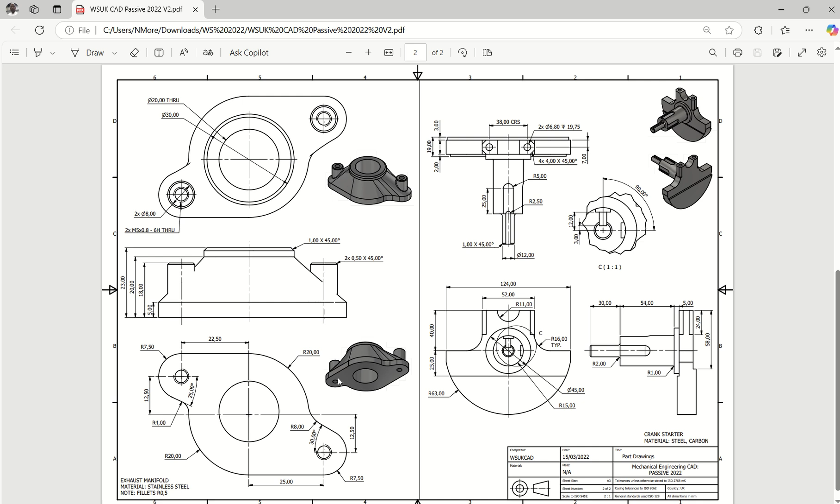Hello, this is another drawing from the 2022 entry pressure test for WorldSkills. I'll leave this up for a few minutes so you can capture the dimensions, because as we said, the other screen is smaller.

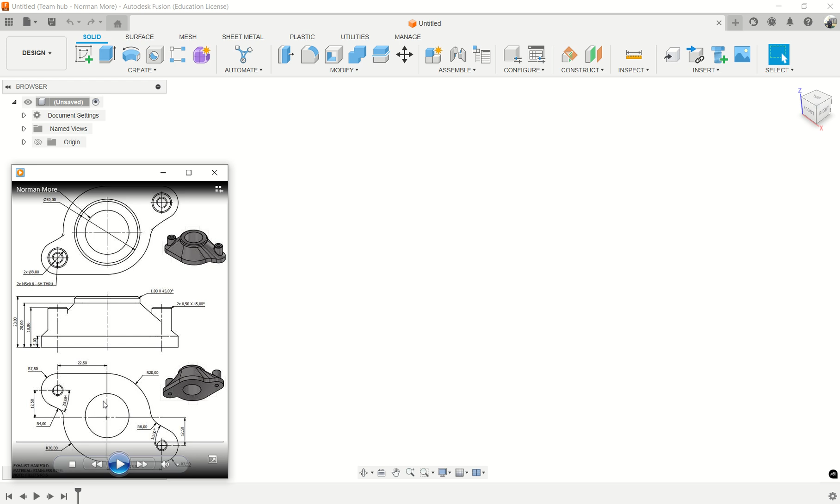Okay, so now I'll bring up our smaller screen and then we start drawing. We start with this bottom part. So I do a sketch on the top plane.

The big circle here is 20 radius, so I'm going to draw the big curve. I'm going to draw a circle of 40, which gives us a radius of 20. Then at the top here, I'm going to draw another circle, 15 mils, and at the bottom as well, another circle, 15 mils.

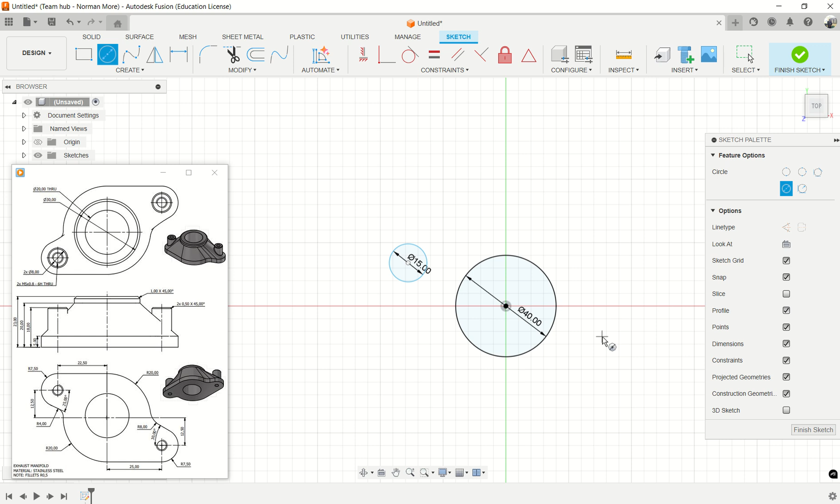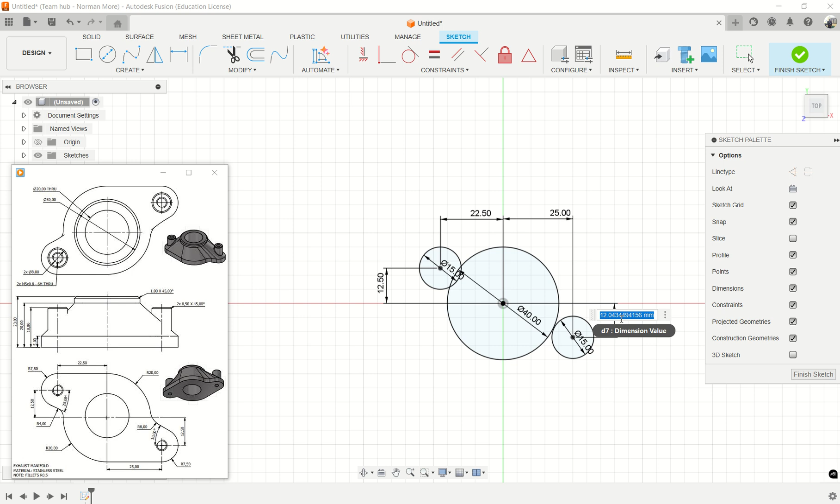Then we try and join these. So you put a dimension from here to there - those centers are separated by 22.5. Then the height from here to there is separated by 12.5. For this one, the horizontal distance is 25, and the vertical distance is the same as the other side, which is 12.5.

Okay, so I'm going to add radiuses on those two sides. I'll use a circle and constrain it. On this side, I'll use a circle of 8 millimeters, and then I will use this tangent constraint to there and to there.

And then for the other side, I'll also use a circle, that's 8, so that is 16 millimeters. Then I'll constrain this one to that one with a tangent constraint and also this side. That makes a neat curve there.

Then L for line, I draw a line from the top of that to the top of this one. L for line again, a line from there to the bottom here. Okay, so that seems okay now. We do the trimming.

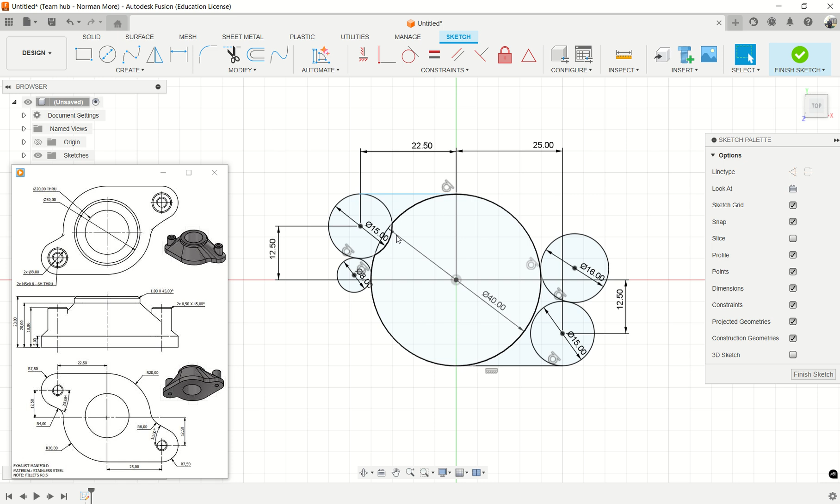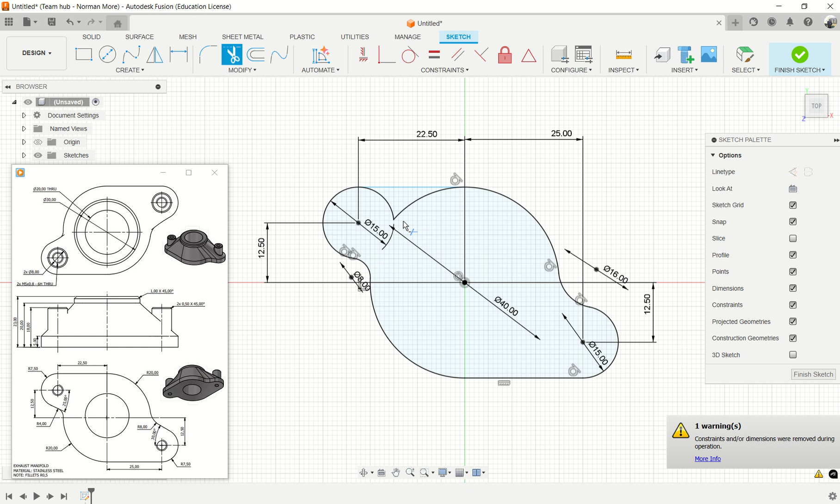Letter T. If I remove those, you can see the shape is starting to come. Remove those. Remove those, and that one. And this and that. So that's the shape we desire.

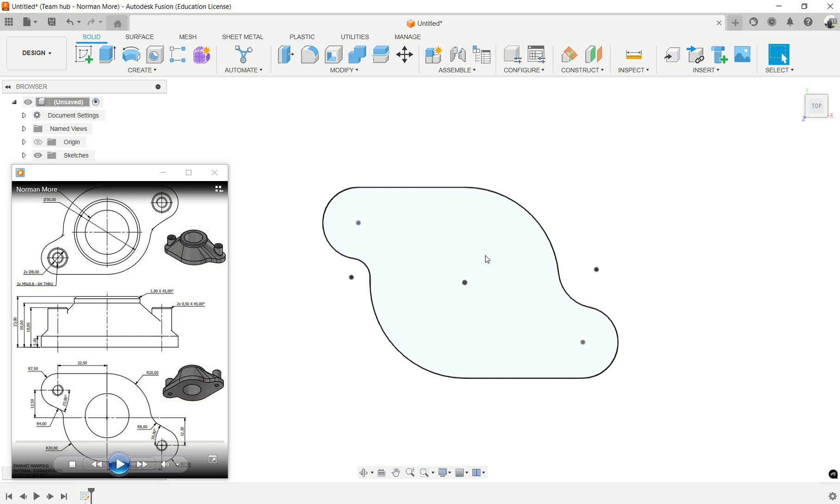There's a hole in the middle. We'll come to that later. So this will be our first sketch. In order to move from there to there, we have that small step, which is 5 mils. I will extrude this one by 5 mils.

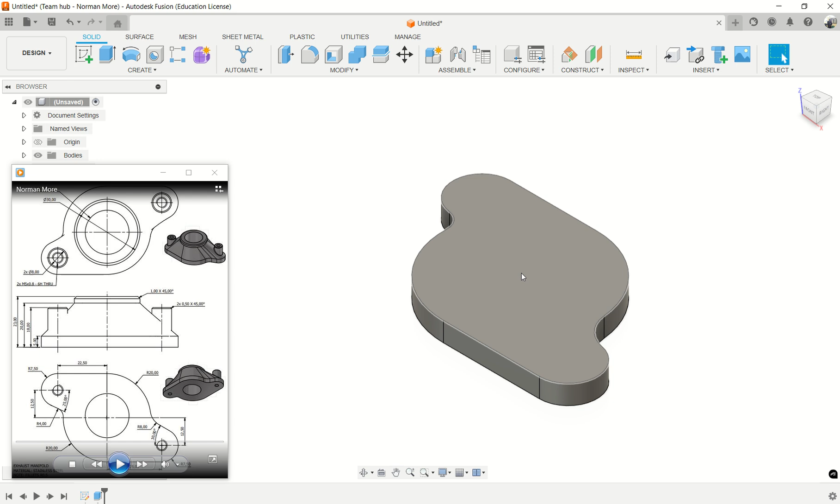If you go in 3D, that's what you've got now. So we need to make 20 mils. We're going to make a circle up there. From this surface, we offset a plane.

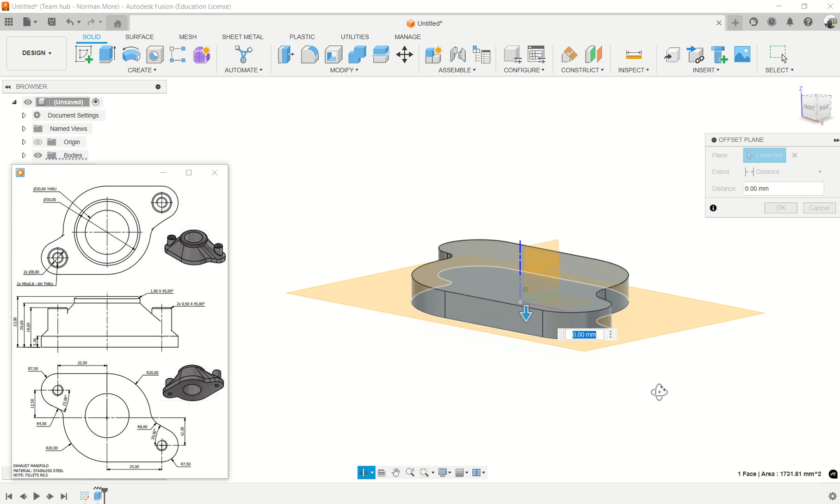Okay, which will be 15 from here, but let's use the actual dimension. So do an offset plane from the bottom, gap like that, which will be -20.

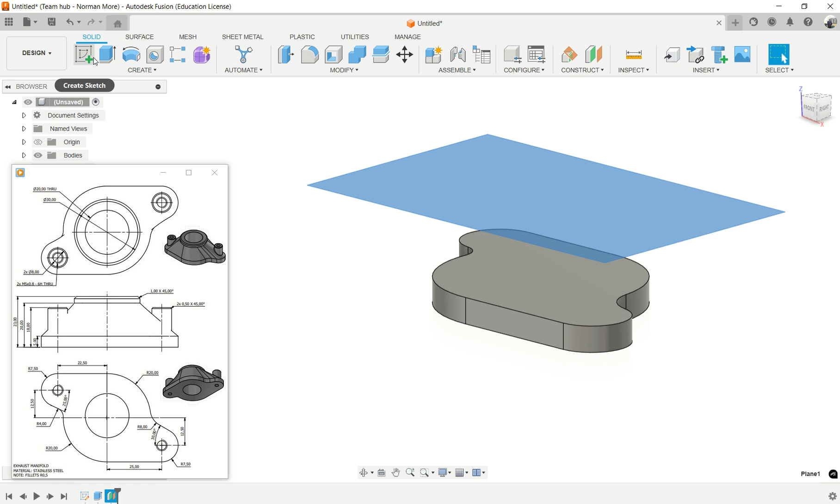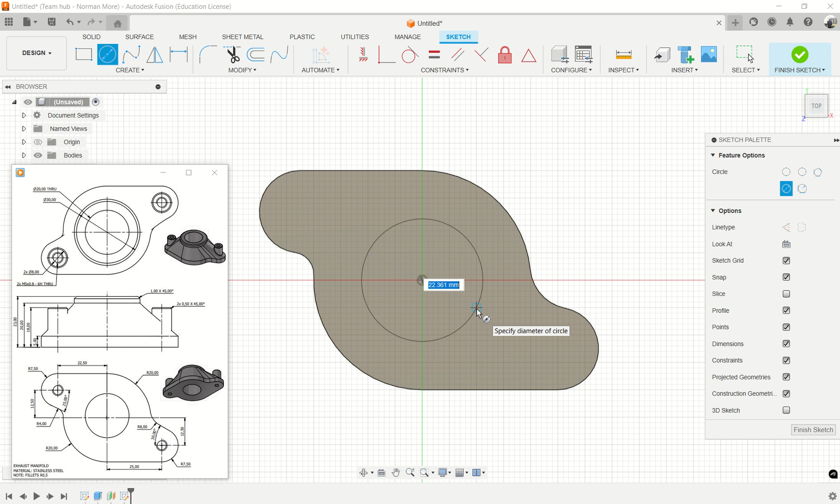So we have a plane there. So on that plane, we're going to draw that diameter there, which is 30, around there, up to 20. So we draw 30, do a circle, then we go to 3D. That's what we have.

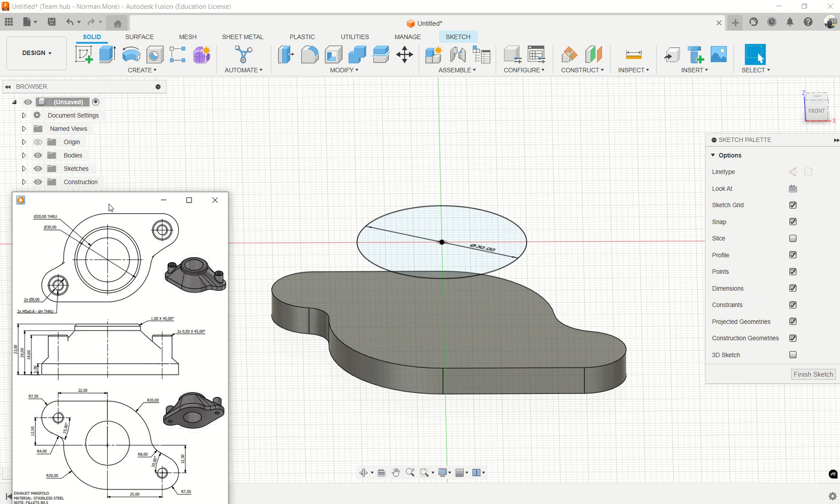So we need to loft this one. So go to solid model, pick loft. If it's not, let me push this one down. So I pick loft, and I'll pick that surface, that sketch, and I also pick this one, and that completes the loft.

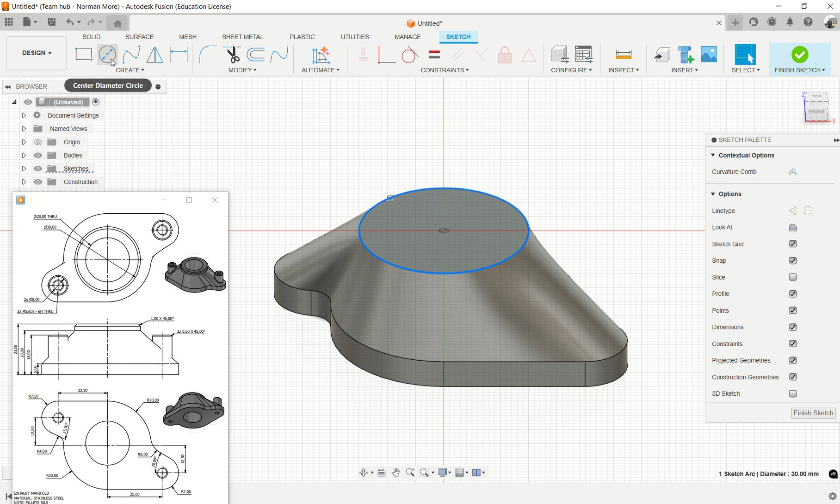On top of this one, we are going to have an extrusion. Let's just put a sketch there, but we shall use projected geometry. Then we push this one up by 3 millimeters according to the drawing. So if we extrude this surface by 3 mils, that pushes us up to the top.

We also have a chamfer of 1 mil. We put 1 mil on that as our chamfer. So that virtually finishes this.

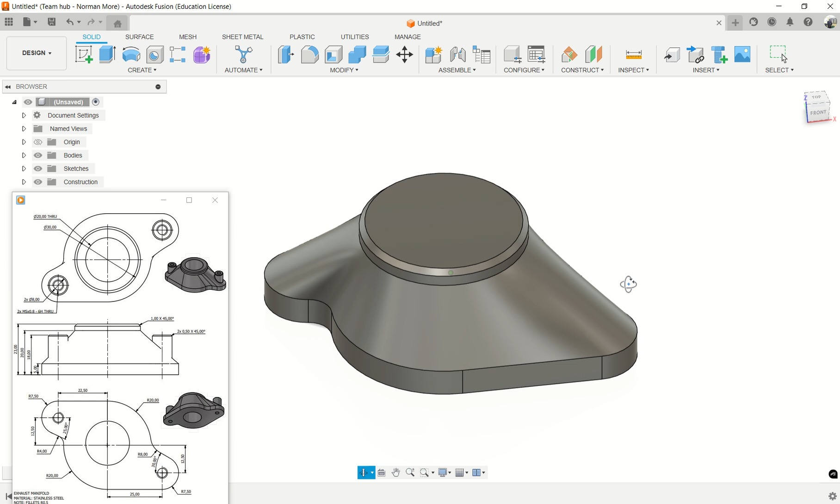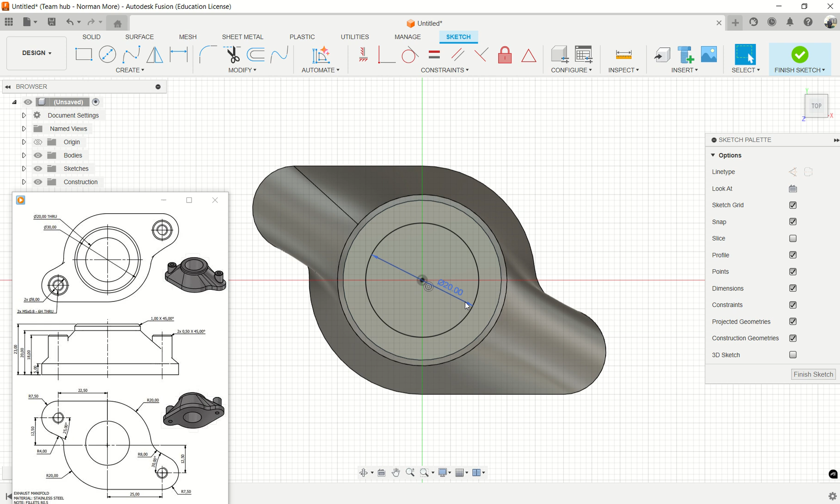So we need a hole here, which is a through hole. According to here, 20 through hole. So I do 20, and then I do extrude, click there, I do a cut distance, or click OK. So that one is there.

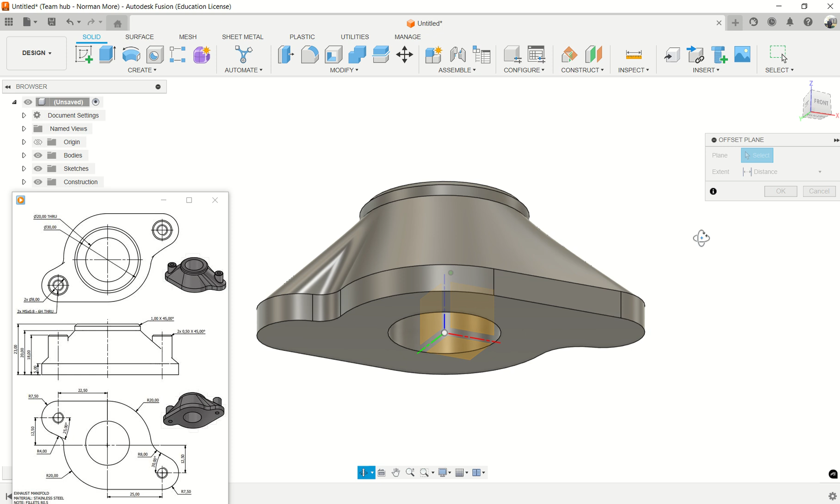So now those two ends, we are going to put again, they are 18 from the bottom. So I'm going to put an offset plane again, reference to the bottom here, and then put -18. Then we have that plane is where we're going to draw our sketches.

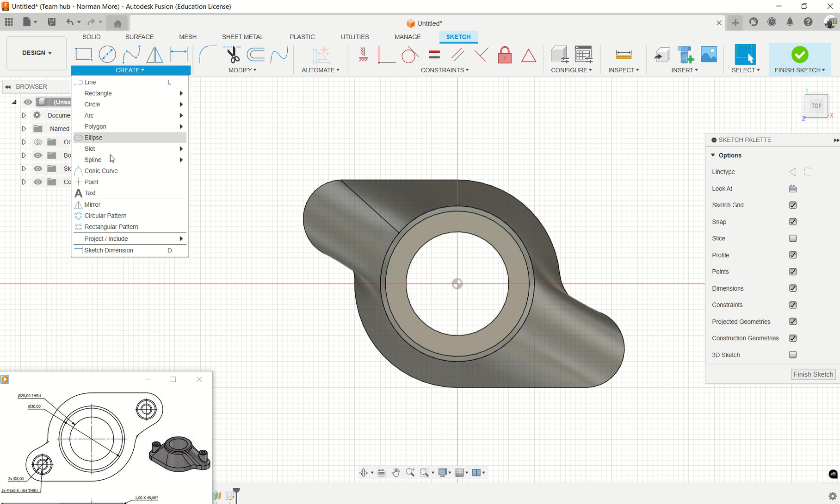I'm going to project this geometry so that we can see where the centers of the circles are going to be. So let me push this one down a bit, and then I do project geometry. I'll project everything on this one and click OK. I'll remove those which I don't need maybe. So that's what we need there.

So I'm going to draw here a circle of 8 mils, and then I'll also draw another circle on this side of 8 mils. So the projected geometry just helped us to locate the center.

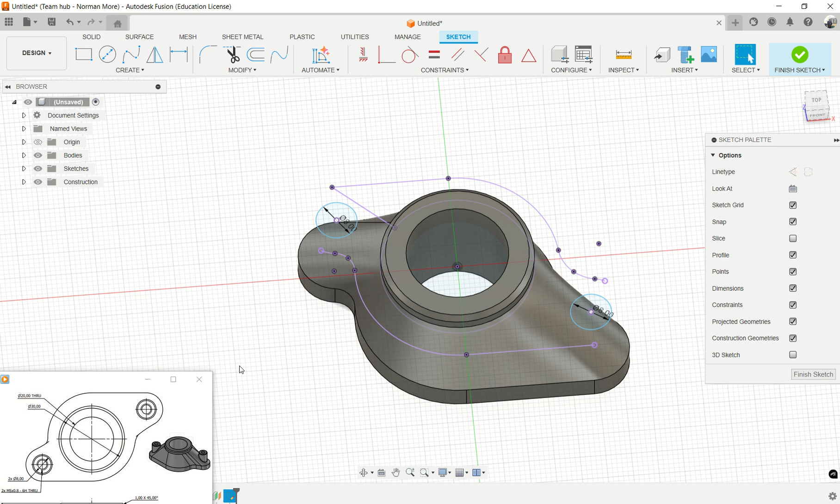I can as well even disorganize it a bit by deleting some of it so that it is not affecting our sketch. And then I do an extrusion. I pick that piece, that is the start of the profile, and the end of the profile I'll put object, and then I'll click there.

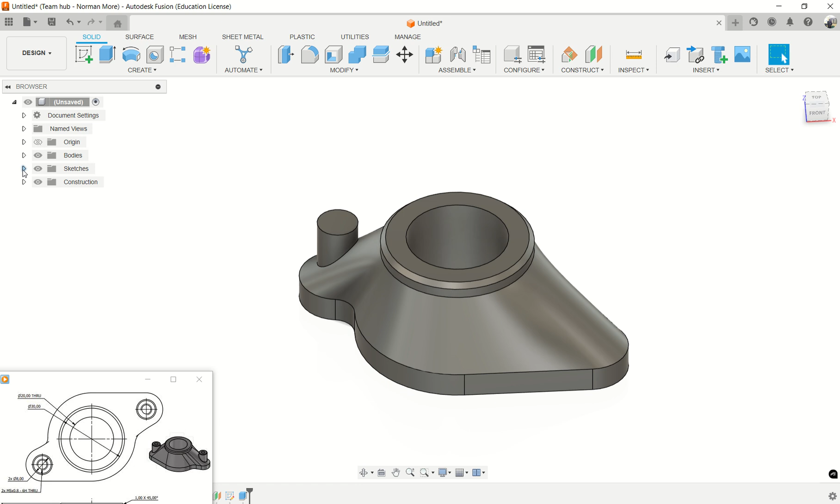It works out better if you do one by one, and then I click OK. And then the sketch has gone, so I need to just go here and switch it on again. And then I do another extrusion. I pick that, and then distance I set object, and I click there. Now I have the two ends.

We can remove that sketch because it's coming in the way. And then now we have to put holes on top of these two surfaces. So just go straight to the hole tool.

This is just an M5 hole. So I choose threaded. I select. I don't know if it will allow multiple, so let's do a single hole.

This hole is self-locating if you click on the edges. And then I go down here, change it to M5, 0.8 and 6H. Because the hole is going through, I will need to put the hole length, which is 18. And then let's put a flat bottom and click OK.

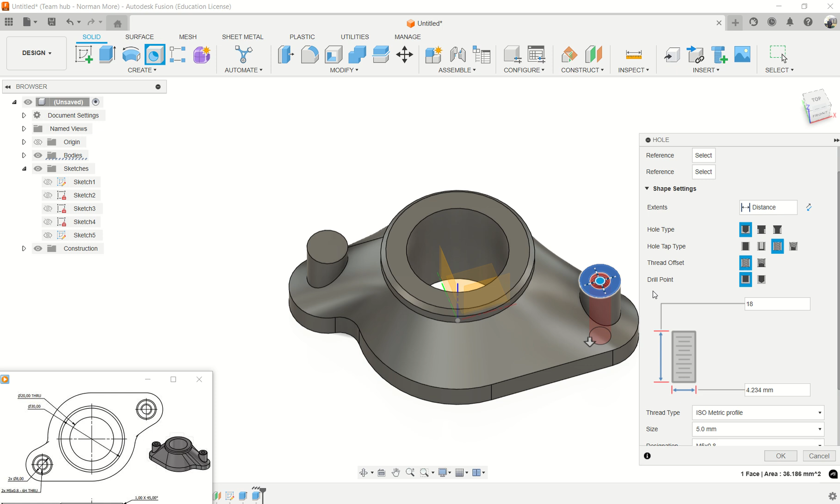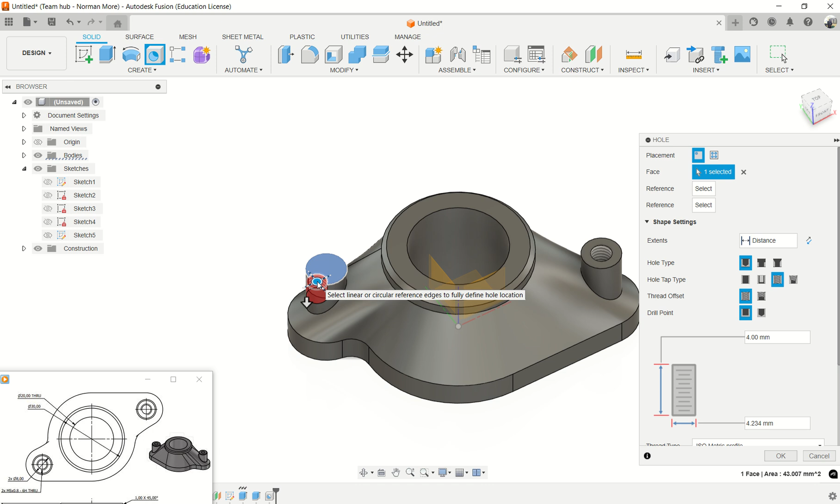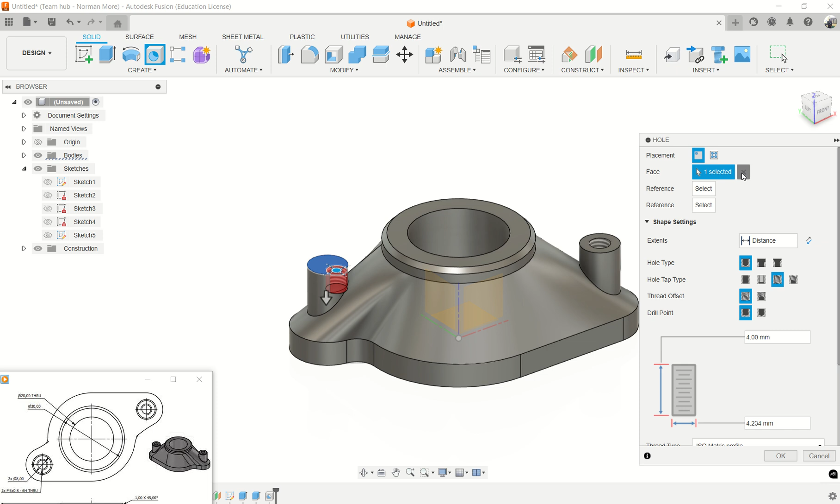I'll do the same thing on this side. Locate it in the bottom. When you click, I can remove this anyway. Then I click at the edge. If I click at the edge, it locates it in the center. Let me try. Let me try again. I don't know why it's not going in the center. Let's try again. That's better.

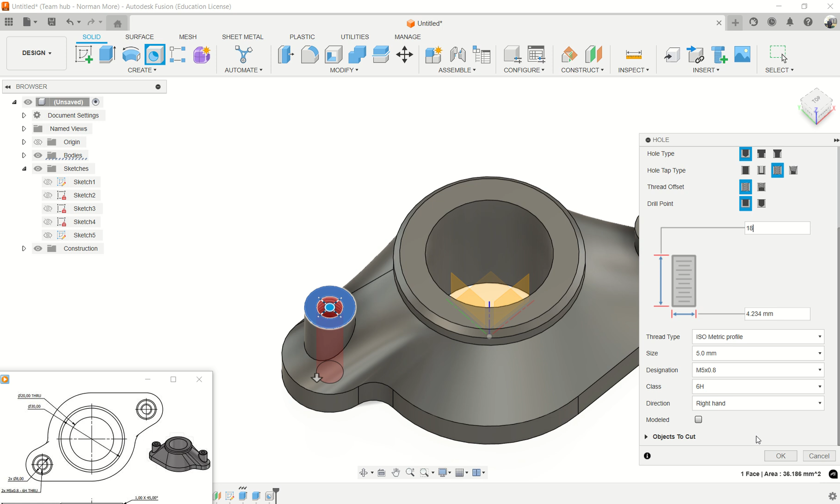And then we'll go here. It's 18. And make sure that every other thing is still the same and click OK. And now we have the two holes there.

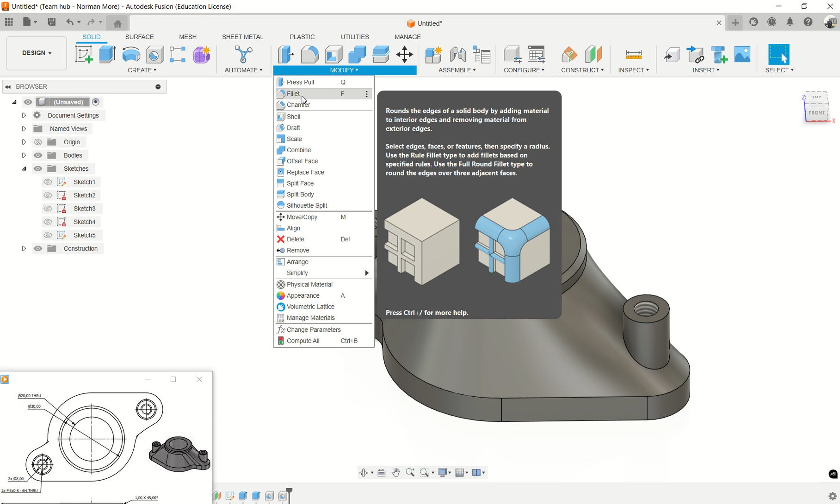There is a 0.5 chamfer on those extrusions. So we go to chamfer, that edge and that edge is 0.5. Yeah, I think that is all. I don't see any other thing to add. Thank you very much.